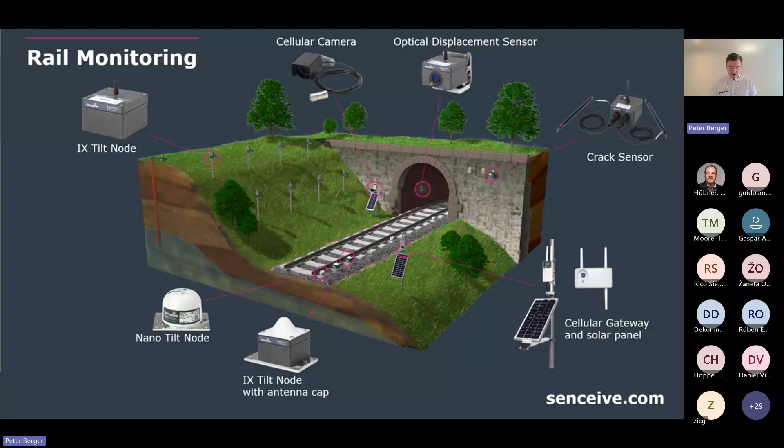Most of our time today we'll talk about our focus on movement monitoring and tilt sensors, but this slide shows our whole railway monitoring offering. We provide different kinds of sensors, mainly tilt sensors that can be installed on railway sleepers to monitor track geometry parameters, or installed at tunnel portals and retaining structures inside tunnels to monitor structural integrity. You can also integrate geotechnical sensors like crack sensors, piezometers in the ground, and load cells if required, all in the same communication network. What we'll focus on today is monitoring embankments and shallow slope failures, where the tilt sensor detects movement and, in combination with a camera, allows you to do a visual inspection on site and decide if it's still safe to operate your railway line.

But before we look into the technical details, what are geohazards? There's a definition you can find in the literature, but it's basically a natural or human-induced geological condition or phenomenon that poses risks to life, infrastructure and environment. Examples can be rockfalls, landslides, earthquakes, volcanic activity, or soil erosion. This can be influenced by climate change or by human contributions.

We see here an example of a rockfall event from 2024 on this red panoramic road in Austria, where a big rockfall event damaged the road. In the past, these events were not so common, but because of the influence of climate change and, to some extent, human contributions, these things are getting more common.

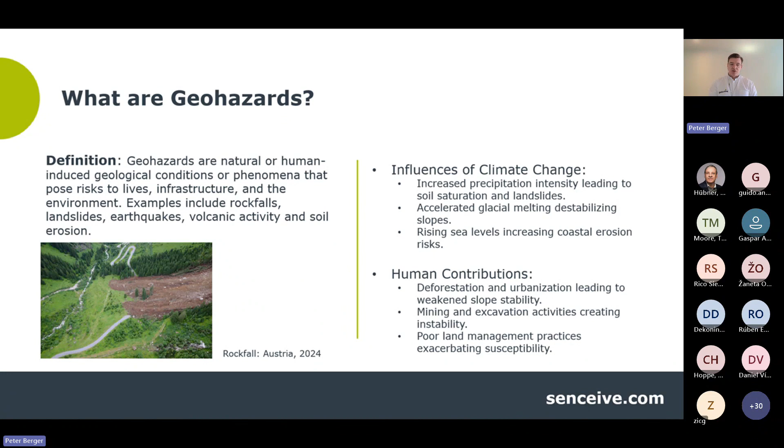What are the growing threats and costs of these geohazards that we've just seen? When we look at Senceive's home market, the UK, and Network Rail as the railway operator and owner of the asset, Network Rail has inherited or manages 190,000 earthworks assets. These comprise soil cuttings, embankments, and rock cuttings, each showing different risks and specific things to consider.

When we look at the map on the right side, where we see all these red dots, in just the last 20 years Network Rail has reported nearly 2,000 earthworks failures. Failures that have caused blocking of the track, have caused trains to stop, or worst case, have caused a potential derailment.

This leads to significant spending on repairing these earthworks and doing maintenance work, and of course monitoring. Currently we are in the CP7 maintenance period with Network Rail, where they will spend 4.4 billion pounds over the next 5 years just for these operational activities - to keep the assets safe, maintain them, repair them, and also invest in monitoring.

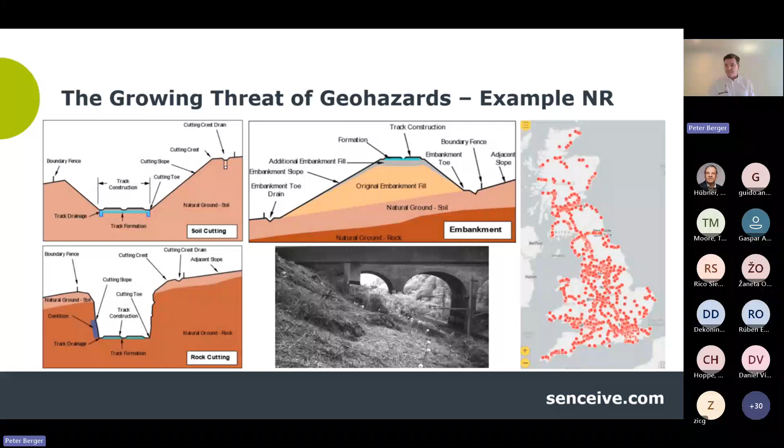But not only in the UK, when we look at my home country, Austria, also in 2024, we had massive rain events in September, where we saw more than 300 millimeters of rain just within a very short time frame. We had rain events where we had in one day more than normally in a whole month, and this caused a big disruption of the railway line in the eastern part of Austria.

The very important connection between Vienna and Salzburg, the Westbahnstrecke, was blocked, and they had to repair it. The tunnels were flooded, we had earthwork failures blocking the track, and they had to repair that. Now it's open again, and the investments and damages were more than 100 million euros just from one event last year.

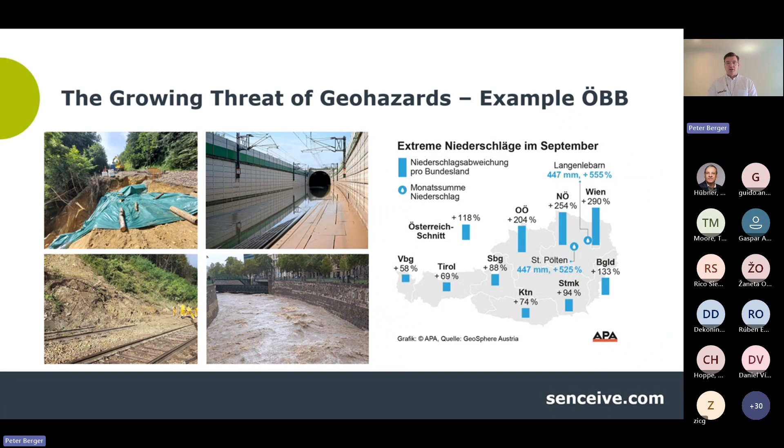But when we look at how we can address these geohazards with wireless remote condition monitoring, we have heard or seen in the last slides that globally extreme weather events have become more common. Just last year, we had a record-breaking year of heat and rainfall, and these consequences include an increased number of landslides and rockfall events that interfere with our infrastructure.

Having an early warning system in place is crucial. What I will present now is an early warning system that addresses these surface slides, these shallow slope failures and rockfall events, and how we can potentially help mitigate the risk.

The key to that is network intelligence, and we call our solution InfraGuard, which leverages a FlatMesh network and some edge computing functionality that allows us to do sudden movement detection. Basically, a sensor normally takes a reading at a predefined interval, let's say every half an hour, and our tilt sensors can do that without maintenance for more than 10 years.

But if something is happening outside this routine or report scheduling, this is key to detect the events that happen during that period. Therefore, we have developed a system we call InfraGuard, where a tilt sensor is installed on a stake that is installed on the slope.

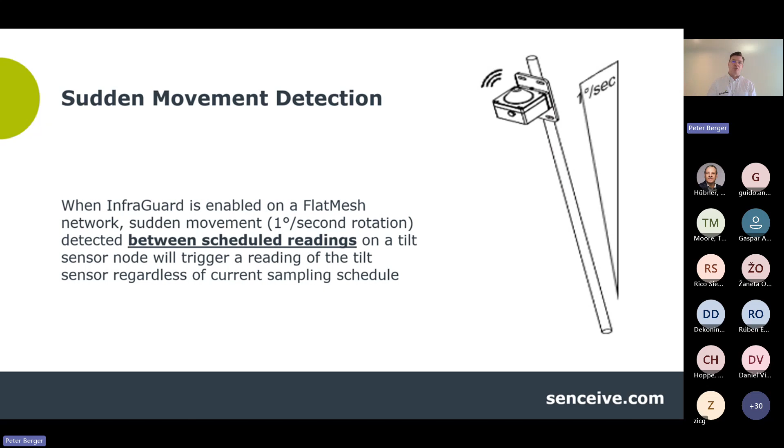And if between these scheduled readings a sudden event is happening, basically acceleration that causes a rotational movement, the sensor wakes up and starts to do some smart things. One of the smart things is expediting alarms.

Basically, that means the node immediately wakes up, takes a reading, sends the data to a gateway via the cellular network to a server, and an alarm is immediately sent out so that you're already alerted that something is happening. So you don't have to wait, for example, half an hour - you get the information immediately.

Then the other smart thing is dynamic reporting. Normally, as I said, you would take a reading every hour, but as soon as something is happening, using predefined thresholds, you can increase the reporting rate automatically.

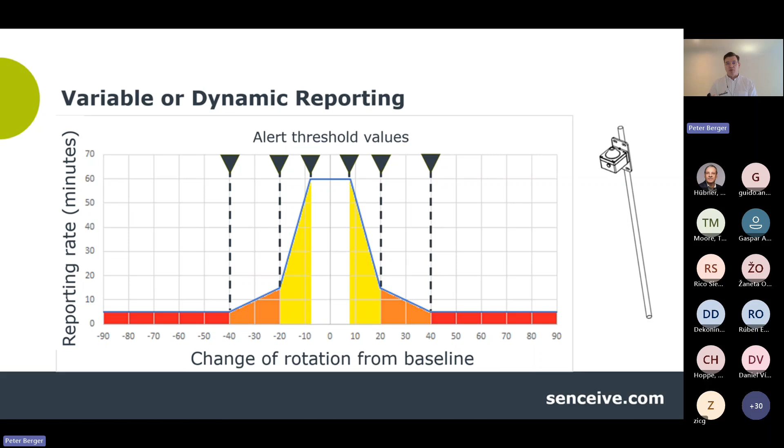So if the sensor starts to detect something, it will automatically take readings at a higher frequency, sending data out regularly to understand if it's a real alarm or not. You see here the different alert thresholds and what is happening - you basically increase the reporting rate if a certain alert threshold is hit.

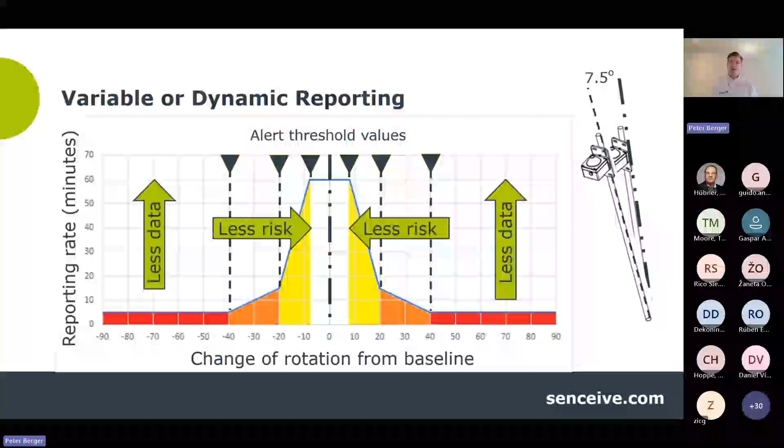At standard times we have less risk, less data. If you have higher risk, of course, more data is sent and more readings are taken. But the other smart thing is that you're also triggering other sensors. This helps us understand: is just one sensor showing an anomalous reading, or is it a genuine alarm?

Yeah, so it wakes up other sensors. They also take readings, and if it's not just at a single location, if other sensors also start to show this trend, then it's a real alarm. An image is triggered, alarms are sent out, and the people in the signaling or control room can then take a qualified decision.

This InfraGuard solution consists of this software and network intelligence, but also hardware components. In this case, the tilt meters come with a very long battery life and are installed on these stakes. Also an integral part is a camera that gives you high quality images triggered by the movement of the sensor, or you can trigger it manually to do an immediate visual inspection from your control room and decide what you need to do.

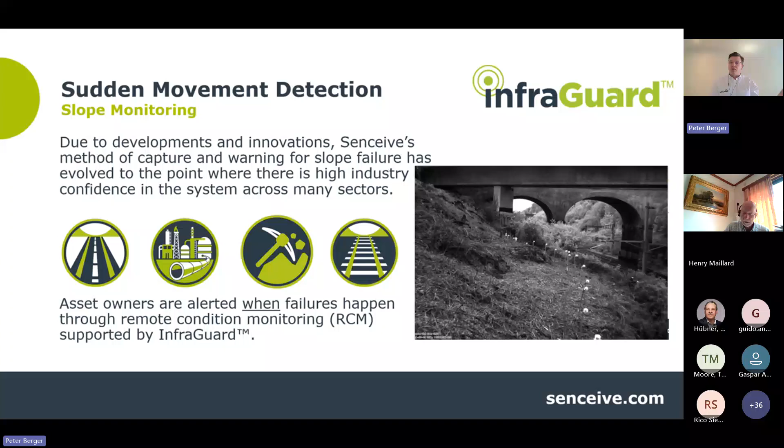In our R&D department, we also do smart things with these camera images, potentially using photo monitoring to get wider information about the area where the slope failure happens, not only at the single point where the sensor is installed, but using these images which we have in high quantity. In the UK alone, we have 60 kilometers of slopes installed with the help of Network Rail, with more than 1,800 cameras installed. With this data, you can do a lot of smart things.

I have here a little video that shows you the functionality of InfraGuard. So we see here a standard UK slope with tilt sensors installed with a camera close by. We have standard UK weather.

It is raining, but it starts to rain heavier. The pore water pressure, the water saturation in the ground, increases. But the sensors take readings every half an hour because everything is stable - they all do a great job. But then one sensor suddenly starts to identify a movement. It wakes up, triggers immediately an image, sends an alarm out, and increases the reporting rate. And you can already check: something is going on.

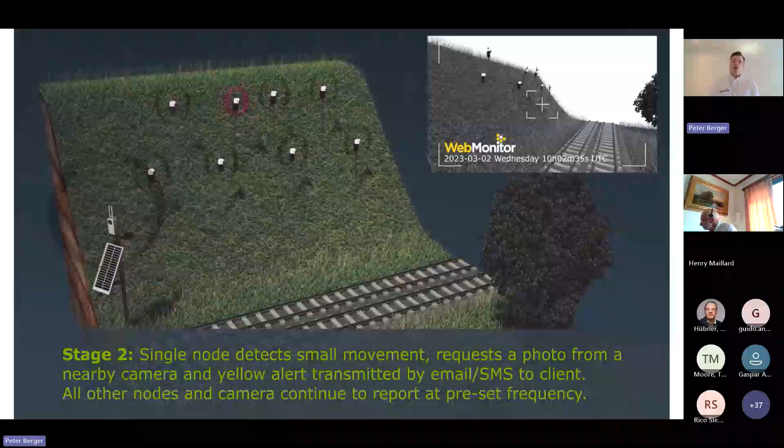You have an early warning and you are alerted - you need to be careful. Then the real event happens. All the other sensors wake up and provide alarms. You get readings at a higher reporting rate, and you get again an image, so you can immediately decide: do I need to stop the train? Do I need to close the track?

This has been done several times, and these systems have avoided derailments, which are always a very costly event. Here again a summary: you see the sudden movement - in this case we detect tilt, the rotational movement. We will see with our rockfall solution that we have a similar functionality for impact when it comes to rockfall. But the key is sudden movement, network triggering, dynamic sampling, and then alarm escalation, integrating a camera to be able to take a qualified decision.

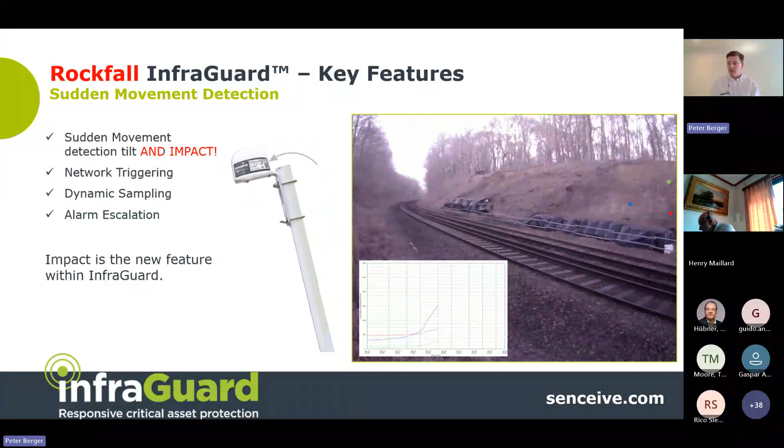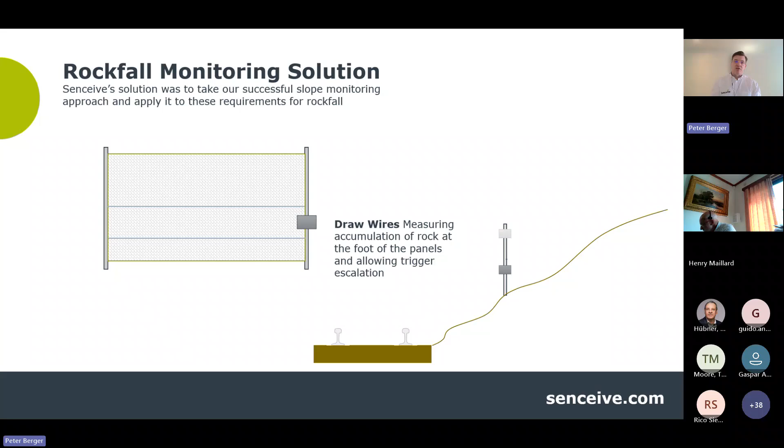But because the UK has a lot of earthwork assets, and in Central Europe we have a lot of rockfall, we have also developed a system using our sensor technology - a combination of a potentiometric sensor with draw wire sensors installed along the catch fence, together with a tilt sensor with InfraGuard functionality, combined with a camera for visual inspection, that can be installed at these rock protection structures.

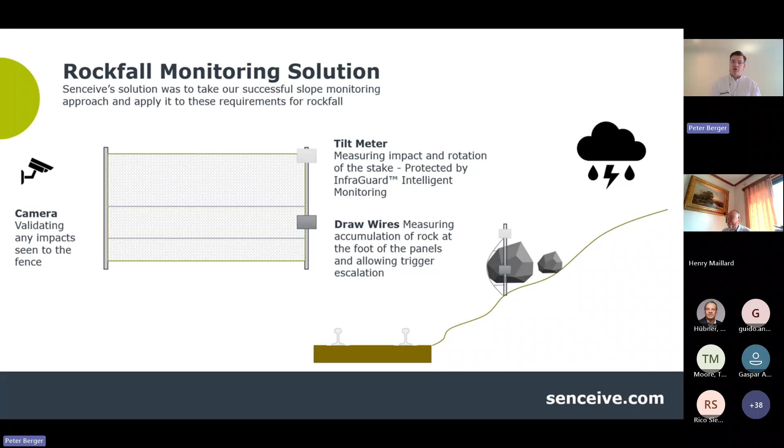If a rockfall event occurs, the alarm is triggered and you also get information on whether the rock protection net is still okay, or whether you need to send the maintenance crew out. Alarms are sent out with InfraGuard functionality - in this case for impact - and you can also get an image to validate what the situation on site is.

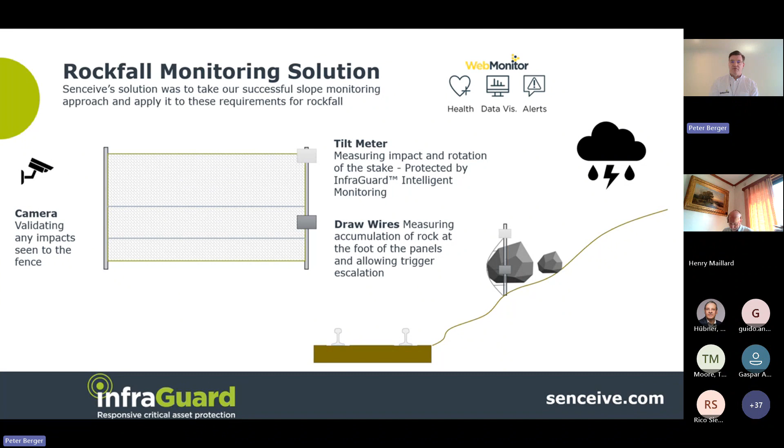We also have here a little video - but I think I need to remove the tone. So you see here different deployments of this rockfall solution. It can be used not only for rail infrastructure, but also roads, or for housing and villages.

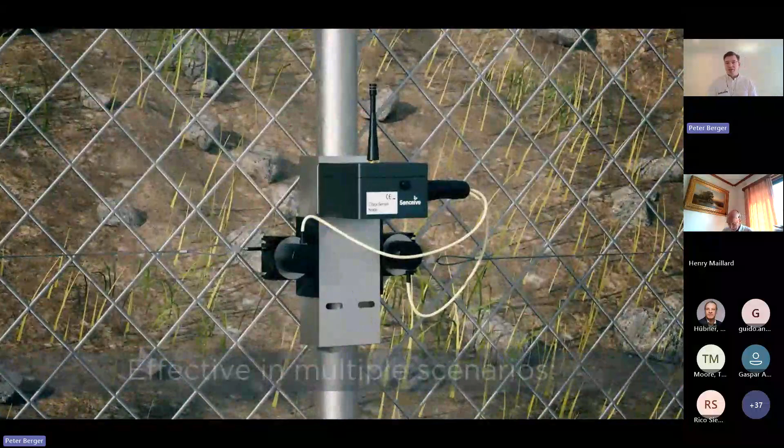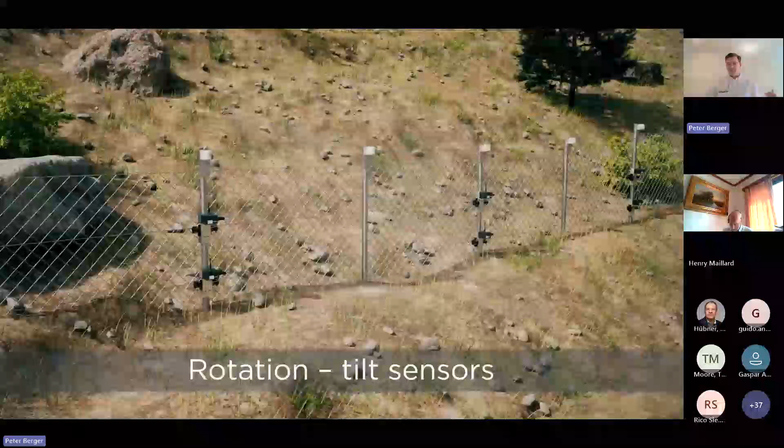You see here the components: this is the potentiometric sensor with the draw wire sensors, and on top you see the tilt sensors. You see here that smaller rocks are falling down - the draw wire sensor detects an extension in the sensor, and you get an alarm letting you know the net is filling up.

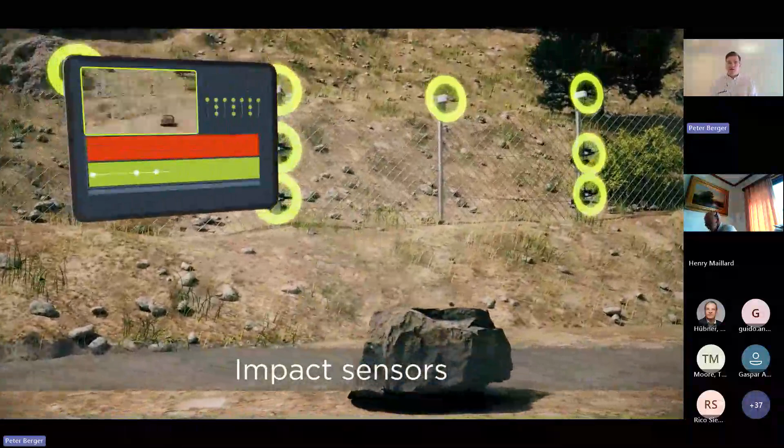Then you have a larger event where the tilt sensor detects the impact, which can also trigger an image and send an alarm out. Or if you have a really large event, where potentially the impact on the pole of the rock protection net is triggering the InfraGuard functionality. So basically for small, medium-sized, or large rocks, you normally have a solution.

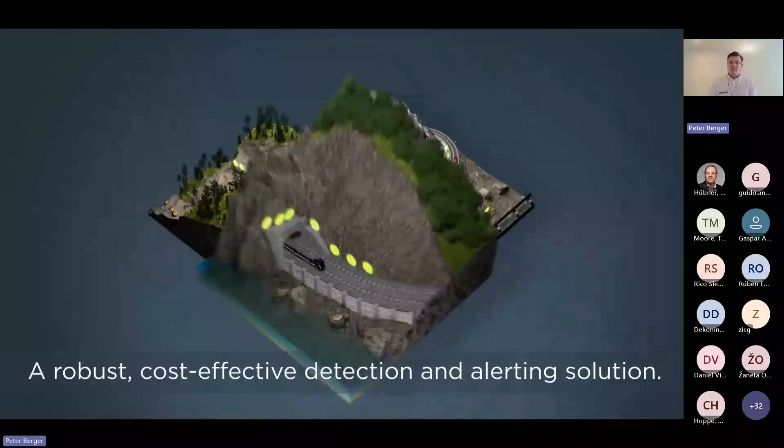We deploy these systems not only at road and rail infrastructure, but also at mining sites and in mountain areas where villages or people might be under threat.

I think I'm good in time, I'm just at 15 minutes. So I have just a couple of slides of case studies to show the functionality.

First, as I said, we have 60 kilometers of embankment installed as part of this maintenance contract with Network Rail. People might ask why do I need the camera? Visual inspection is important because then you can detect if something is blocking the track or what is happening on site, without having to go there. The key thing is that the camera needs to detect, even during the night, an object the size of a football at a distance of 50 meters. This allows the train operator to decide if he needs to close the track or not. But it also does other things.

Here you see a nice image from the daytime. It not only detects slope failures, it also detects, in this case, a car that has unfortunately hit or driven down the slope. So the system can also detect these things. It's not the main purpose, but you know what is going on at the site.

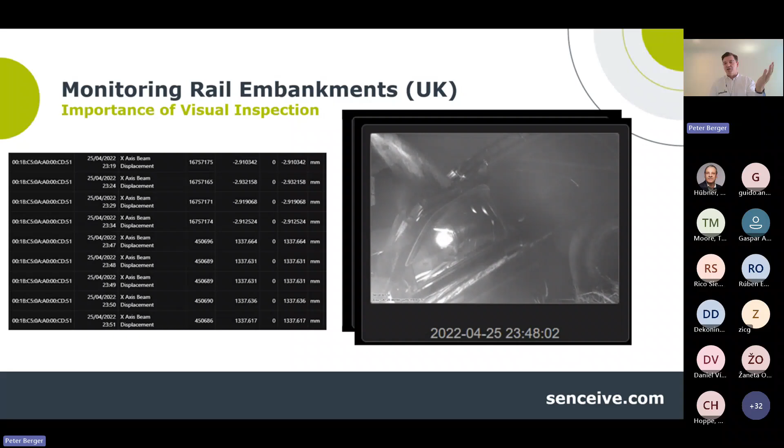If you just got this crazy alarm, before you had 3 millimeter per meter movement, and suddenly the pole is hit and you have a large rotational movement, you would say the system has a problem, this can never happen. But if you look at the camera, it was a car - not expected, but still a threat - and they had to stop the track and remove it.

So this is the situation in the morning. Network Rail did a great job removing the car, and in the morning everything was fine again.

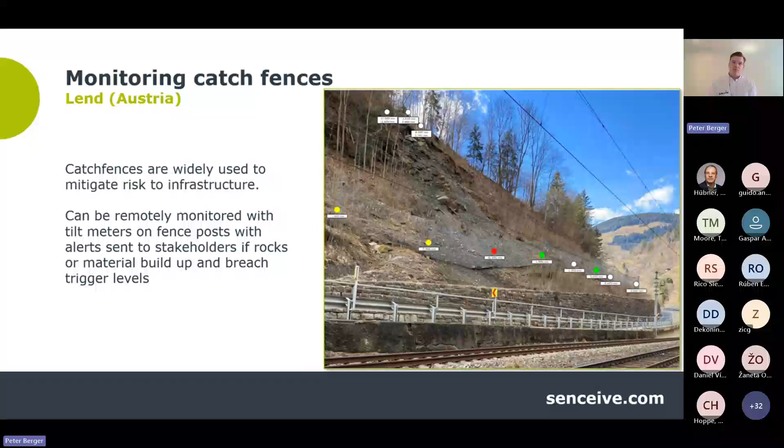Another example from rockfall, at a location in Austria, south of Salzburg, at Lend, where we have a road and below it a railway line. They installed a rock fence with 1,500 kilojoule design impact load, and tilt sensors were installed on the poles with Austrian Railway. The reason was because they knew there was a rockfall threat, so they put this rockfall protection in place. The system was installed and worked properly.

You see here an image from the morning. What does the system do? In the image on the right side, smaller rocks start to fall down. At 9:17, the first alert was triggered and an image was taken. Normally only every 6 hours an image is taken, but now it was triggered, so they could immediately look at what was going on there.

Later, at 10:12, the big rockfall event happened, and you see that the rock net filled up. It did its job - it protected the asset, but you can also check visually using the camera how big the threat is. They were able to talk with the geologists and the maintenance team, send people out, and fix it again. That was exactly what the system should do.

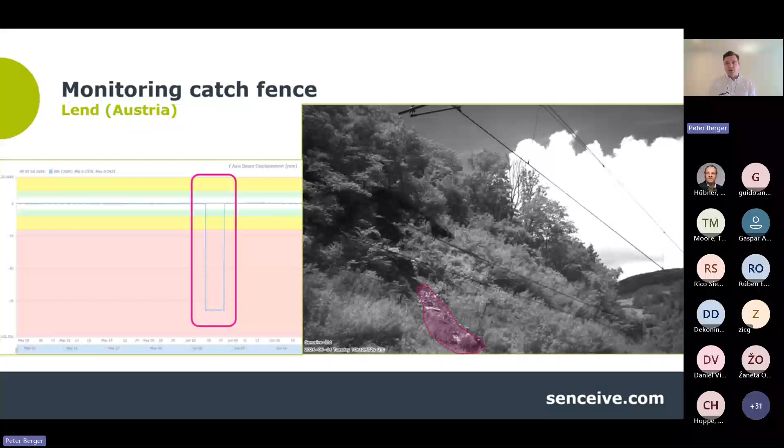You see here also a time displacement graph - here is the event, here is what the event caused. After removing the material, the system was reset and baselined, and it's now working again. For a couple of years now, it's been doing its job and providing reliable data and images from site.

Good, I think I managed to stay in time, and I think it's now a good time for questions and answers. Thank you very much.

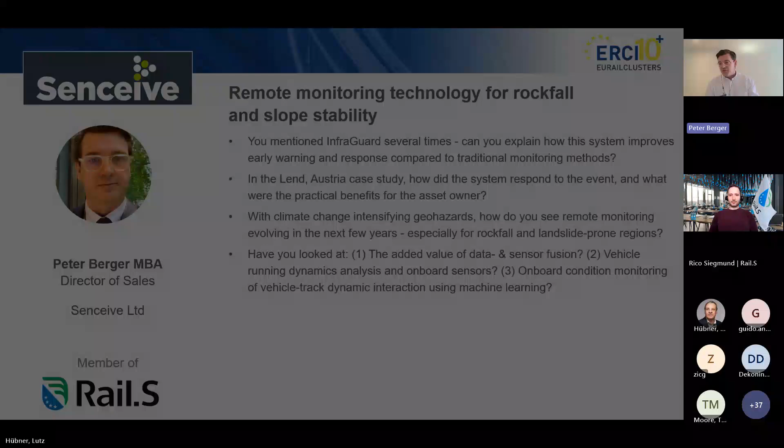Then also, have you looked at vehicle running dynamics analysis and onboard sensors? Well, we as a company mainly provide sensors that are stored at the location, staying there for many years without maintenance. But we know there are smart companies out there who have vehicle-based sensors that give you information about track geometry, if it's safe to operate.

We are not looking into that, but the information we get from these systems - if there's a train-based system that does scanning or uses high-resolution cameras - I think it's important to use that information, which you potentially get anyway during railway inspection of assets. Use this data you already have to qualify, identify, and map slopes and potentially earthworks assets, and use these systems for this mapping and identifying areas of significant risk.

And then, have you looked at onboard condition monitoring of vehicle-track dynamics interaction using machine learning? This is a very, very interesting field. Of course, we're always looking into new technology. At the moment, we are really providing, let's call it, static monitoring at a certain location.

But I think this could be something interesting to explore, and also to cooperate with companies already using that. Machine learning, for sure - not only for that, but also as I mentioned, when it comes to image correlation, photo monitoring, and predictive maintenance - I think all these different fields need to contribute to a holistic view on the risk of an asset.

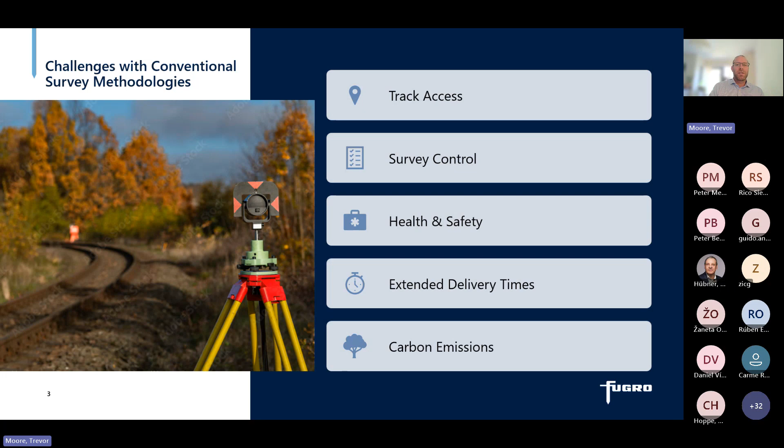So what's the alternative? We have what we call our RILA system. It is a train-mounted sensor. To give you a quick overview, we have a GNSS sensor, which picks up the absolute positional accuracy of the unit and the resulting data. That works together with an IMU, an inertial measurement unit, which is a very high accuracy sensor that picks up all the slight movements. It's got accelerometers and gyroscopic sensors within the sensor. It works together with the GNSS receiver to then provide very high accuracy information.

We have a 360-degree scanner which works in a profile that captures the railway environment as the train moves down the track, and that scanner is used to provide gauging information, but also provide the three-dimensional point cloud data that we capture, which can be used for a variety of use cases. And finally, we have our railhead profile scanners, which we call the rail stripers. This projects a laser scanner onto the railhead, which enables us to accurately determine the cant and gauge of the track, as well as the rail profile.

So we can actually measure the height of the rail. We can measure the rail wear as well. And then we also have three forward-facing cameras, so that gives us the visual data that we need, and that can be used for understanding the track environment and helping us determine or utilize the point cloud data.

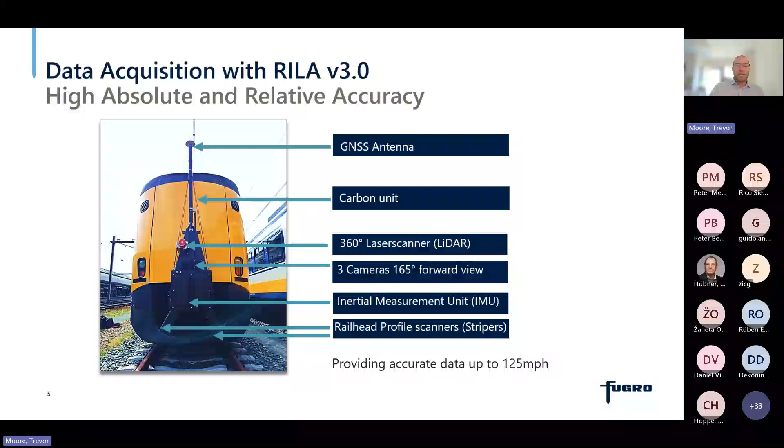So the product itself has Network Rail approval. Network Rail has actually written or created a specific accuracy band within their specifications for us, which they call Band 1A, which enables us to provide accuracy, certified to provide accuracy to an absolute position. So in real world coordinates, the true position to plus or minus 8 millimeters in plan and 12 millimeters in the vertical. But in terms of relative accuracy, relative from the track itself, we can provide the data to an accuracy of 5 millimeters.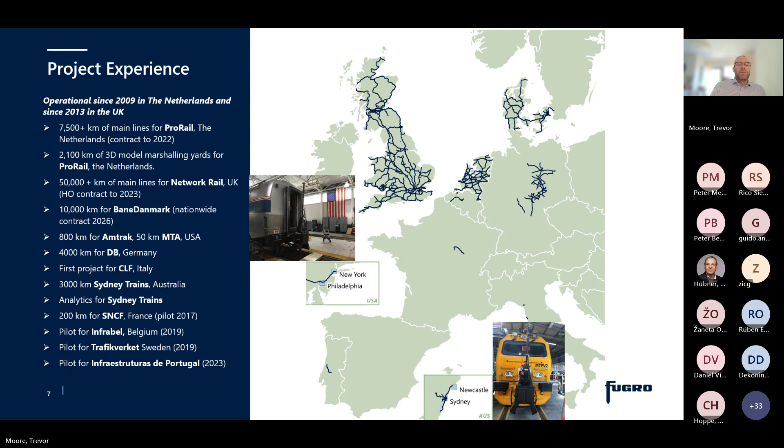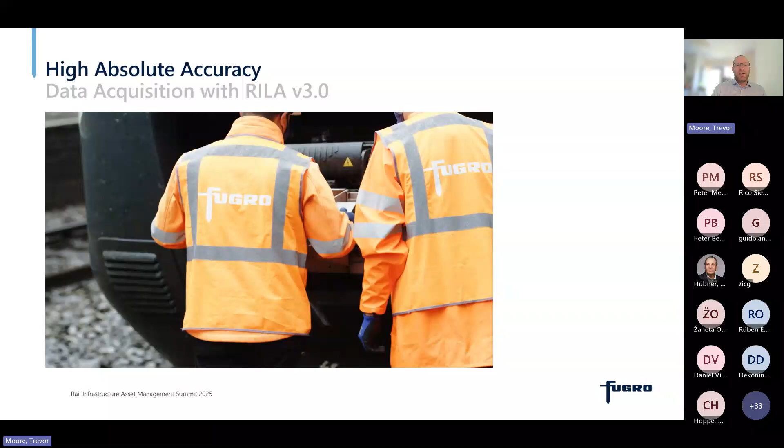So this little video here basically shows how the unit is attached to the front of the train. You can see he's attaching the coupler adapter. So we have various different adapters that can be used to suit various different coupler types. We also have a buffer adapter, so if we want to attach the unit to an MPV or other rail vehicles, we can do that as well.

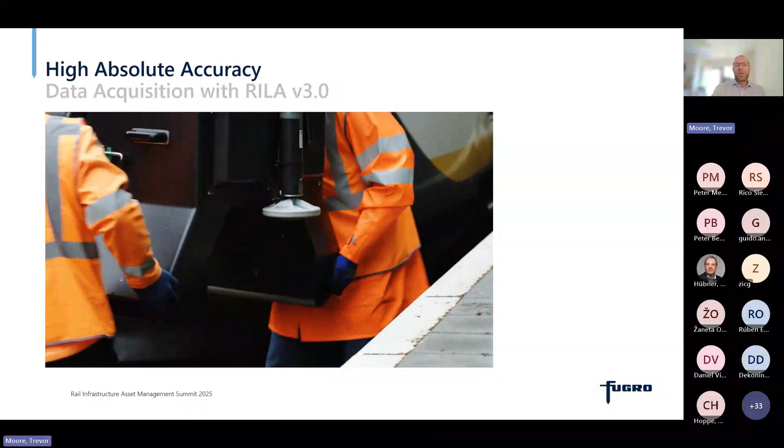So the unit then is attached to the front onto the adapter, and then we raise the mast to then capture the information. We are currently working on developing a shorter mast so that the mast sits just above the unit.

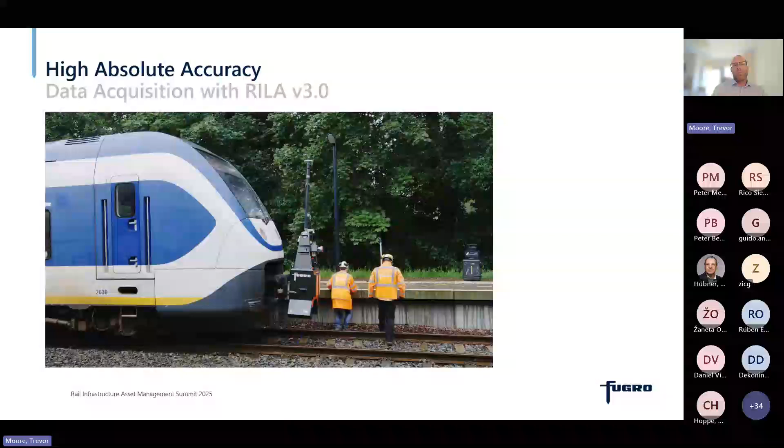It's never really been a problem because the mast doesn't really obscure the driver's vision that much. The main reason we're doing that is that we have to turn the unit on when it's on the side of the platform, and then when we move it onto the train, once the GPS signal has moved up, it basically feels like the unit itself has swapped hemispheres, because it's turned from upside down to up, and it really messes with the processing. So it's just going to make it a lot easier for us, and the data will be cleaner, helps with the localization, that type of thing.

So in terms of our position in the market, we can serve various different customer groups. For geodetic surveys, that's normally carried out by track trolley surveys, total stations, or static laser scanners. RILA provides an alternative to that without having to access the track. In terms of inspection and monitoring, so asset condition, we get the absolute track position, but we also get the relative information and the track geometry as well. That's normally captured by measurement trains or by visual inspection.

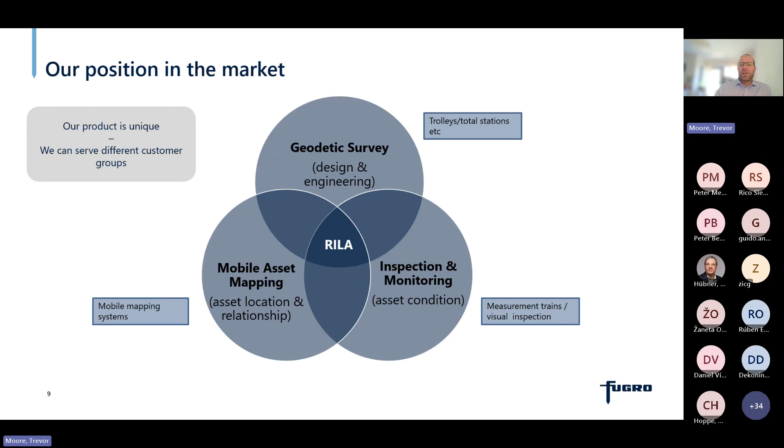So we can service that customer group as well, and also asset mapping, so mobile mapping. Normally, you can get a mobile mapping unit that is attached to a specific vehicle. Again, we can service that market, but the fact is that we use in-service trains, which means that we minimize the impact on the rail environment.

So a little bit more about RILA and its benefits. We don't need track access, so it's far safer. We are able to mobilize far quicker because we don't need to wait for track access. We simply position the unit on the front of a train at a terminal station, and we can capture rapid amounts of data and rapid capture over extensive distances in a day.

So the unit operates at up to 125 miles per hour, so you can imagine the amount of data that we can capture in a day. It can be fitted to a wide variety of rail vehicles in under 2 minutes.

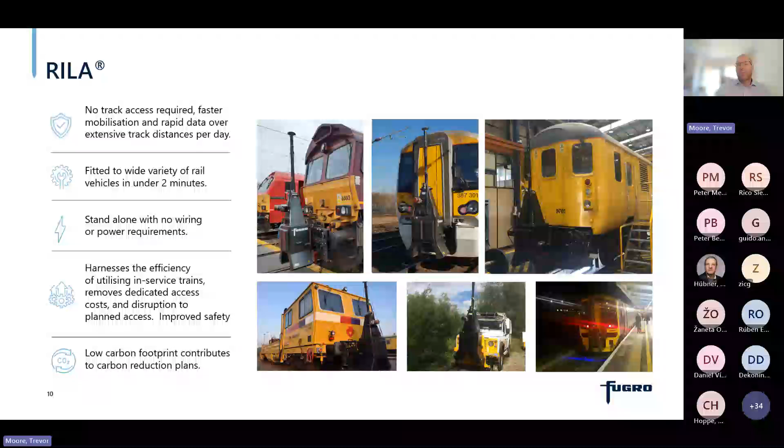It's a standalone unit, so it doesn't need any power from the cab or the train system, which means we don't infringe on any other operating systems. We use in-service trains, which removes any dedicated access costs and disruption to planned access. And because we're using an in-service train, we're minimizing the carbon footprint that would normally be associated with return visits to capture the survey information.

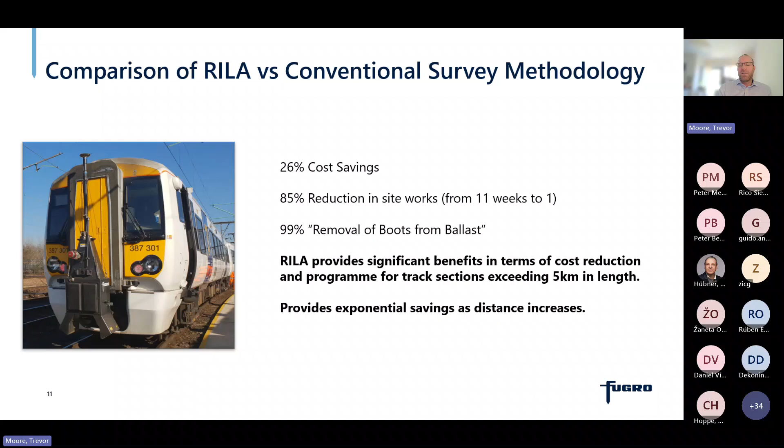So really a big increase in safety. And RILA provides significant benefits in terms of cost reduction and program for track sections exceeding 5 kilometers in length, so that's our kind of sweet spot. If it's smaller, it's probably more cost effective just using a track trolley or a conventional surveying approach. But once the survey length increases beyond 5 kilometers, there's exponential savings.

So some of you may have seen this pyramid before in terms of the data pyramid. We've got data at the bottom, which is essentially when we capture information. We take that data and process it into information. We use the information then to understand and get knowledge, and then get wisdom - getting insight to help us make strategic decisions.

So how that applies to RILA: we do our data capture from our train, then process the information, combining all the different sensor information using various algorithms that allow us to produce our 3 core data products. We have the absolute track position, which can help us manage the track position and understand if there's track movement over time. We have the matched point cloud, which is our core data product usable for various different use cases. And we have the geoposition videos. Those are the 3 main data outputs that we have.

And then we can use that to produce our information products. So we can use it for structure gauging, showing the information within our portal, or we can produce an SC0 file, which is the format in the UK, which then goes into the RGDS database, the railway gauging data solution. We can also do third rail mapping and gauging, understanding if the rail is too high or too low, which would affect the contact with the third rail and the wear. Sometimes people don't know where the rail changes sides, so we can map all of that very accurately as well.

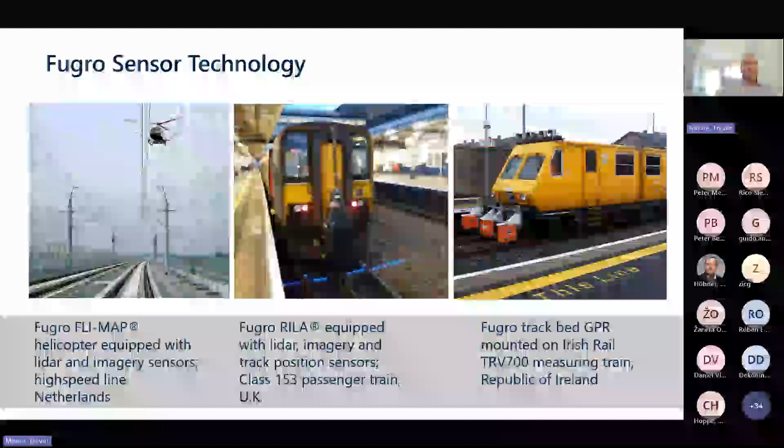We have various different sensors. We've got our helicopter-based solution, which provides aerial LiDAR. If you want to map a wider corridor, we can combine the aerial LiDAR with our RILA data to actually improve the overall accuracy of that information. And we also have a train-mounted GPR sensor, if you want to understand below the track bed and the various geotechnical information of the track as well.

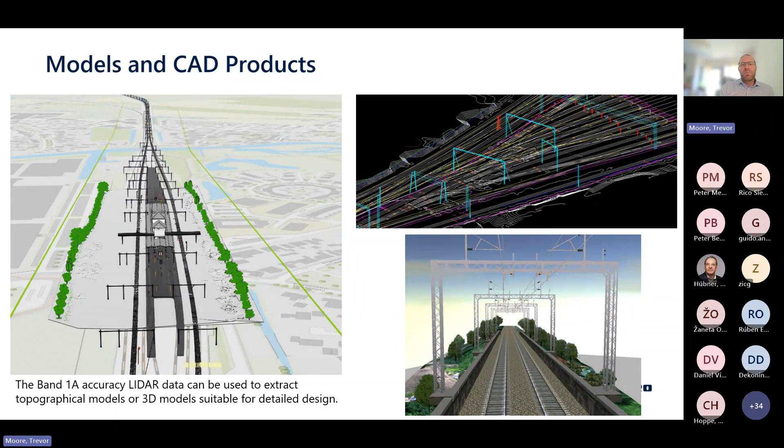From our data, we can produce models and CAD outputs for design, whatever is needed. There are multiple uses of that data. Just looking at our rail portal, this is where we can visualize the data as well. You can click into the portal, and it allows you to then visualize what's on the track.

It's a GIS-based system, so we can also change the functionality of this. We can use it as a download tool to deliver information. We've got our imagery and our scan data all in one portal. We can move backwards and forwards along the track as needed, and we can change the transparency of the imagery. That allows us to overlay the scan data and the imagery, which helps a little bit with the interpretation of the data.

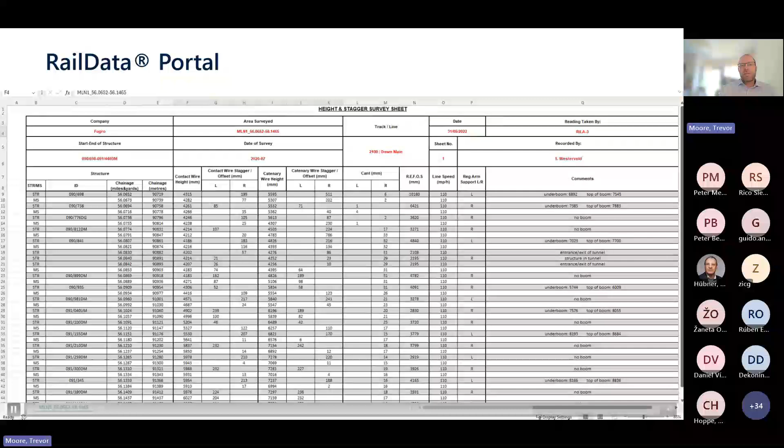Within these little blue dots along the track, we can pick up information. That's our absolute track position. We know the coordinates, we know the chainage, it tells us the engineer's line references. But we can also download the data as well, like a height and stagger form in the network rail format, so we can pick up lots of different information.

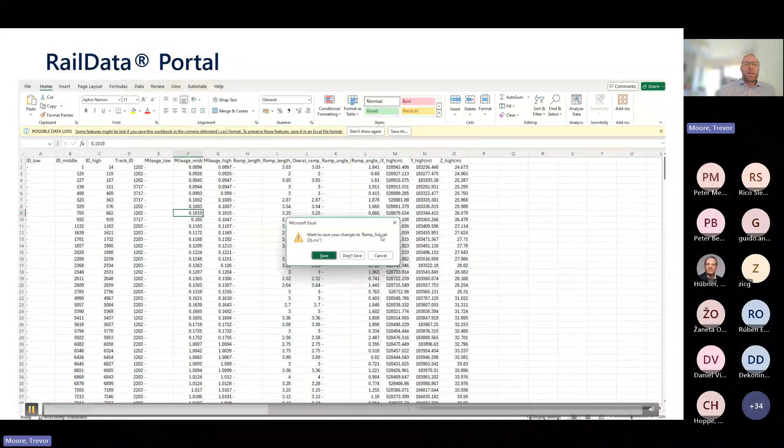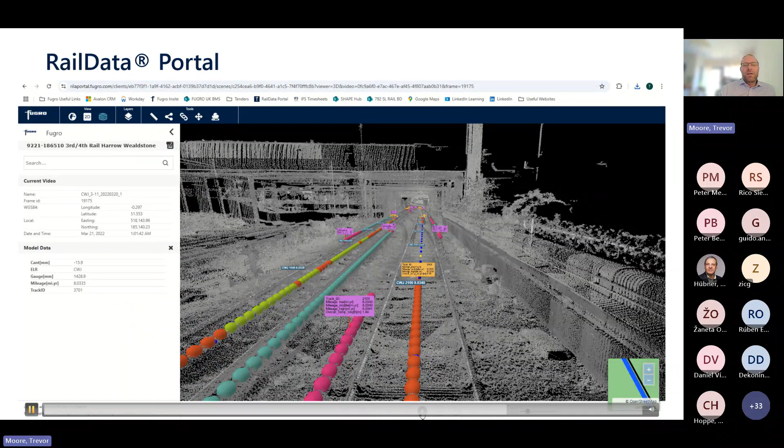This is another quick video where we've used the portal to show third rail mapping. You can see we can again download information and get track geometry, track center lines. All of the information is translatable, so we can export it into different formats. You can also see by the colored nodes along the track, we can set different parameters to tell us immediately where something is in tolerance or out of tolerance—for example, where the conductor rail is a little too low or too high. It's a very easy way to help us visualize exactly what's happening with that track.

So finally, just to recap on the key benefits: safety is the number one priority. Removing boots from the ballast, stopping manual survey activities, and eliminating site visits helps us improve safety. We've got efficiency—using in-service trains means reduction in access costs, less disruption, and contributes to carbon reduction. We have accuracy and repeatability: our system does multiple runs along the track, allowing us to average the data, and we have smart algorithms that help us match the track strings together to get the best optimized accuracy. This is repeatable to that band 1A accuracy.

As I said before, there are multiple use cases for maintenance, asset management, and operational purposes, all from the same data set. We've got our RailData platform, which is pretty much ready to go, and we can supply data into your own systems as well. We're also approved by Network Rail for gauging.